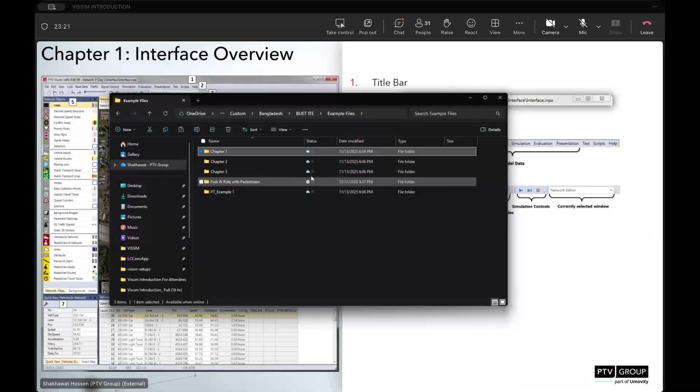Okay, so this is the interface overview. When you open the VISSIM software, the interface is pretty similar to any other GIS software, or any AutoCAD software. If you're familiar with ArcGIS, it's pretty similar. The main window is your network editor window, where you will draw everything of your network object, network item, or any kind of rules and regulations. This is your main network window.

On the left side, this is your network object window. From here, you can select your appropriate network object that you might need to enter into your network. For example, the first section you see is link, then desired speed decisions, reduced speed area, and then vehicle input, nodes, etc. Those are the things.

On the top bar, those are pretty much common standard format. You might even be familiar with all of those, even in Microsoft Word. So you have this title bar, menu bar, toolbar, etc. This is the title bar, this is the menu bar, and this is the toolbar.

If you look carefully at the title bar, we have a few additional pieces of information. First, it says which VISSIM software you are using. For example, here it says VISSIM 8 Service Pack 6. Then immediately after the software name, you'll see the file name that you have opened. For example, this file name is interface.inpx, located in that folder.

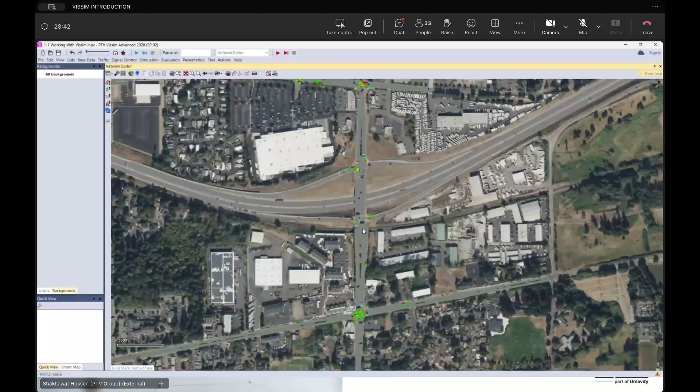All right, so under the signal controller, after opening this one, first thing is our main purpose is just to run the simulation and see how it looks like. So to do that, we don't need to be worried about the signal controller.

So what we can do is delete all the signal controllers there. To delete that, go to Signal Control, then Signal Controllers.

Again, go to Signal Control, Signal Controllers. From here it will open up this window. Select this one, and after selecting all of them, select all and delete the signal controller files.

So select all of them and delete. Delete all of them and confirm delete. That's fine.

Okay, so when you are done, now it's time to run the simulation. You see on the toolbar we have this icon, the green play bar icon. Just click that one and you see the simulation is running.

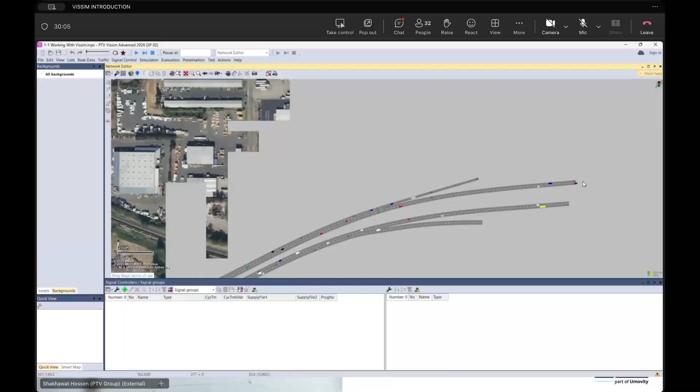You can pause it somewhere here. You see, a vehicle is generating at every starting point, and they're following the simulation, following the path. You see.

We can also continue, if we hit the play button it will continue the simulation. You see. Again, I'm hitting pause, so now it is paused.

Now it would be good if we can look into the simulation, or the network, in 3D view. So here you see a box, a cubicle box. If you hover over there it shows 2D/3D. If you select that one, now it is in 3D mode. You see, you can see all the vehicles are there.

You see some rectangular shapes instead of vehicles, because for that specific one we don't have the 3D model. That's why they just look like rectangular cubicle boxes. For example, if we proceed the simulation, you see the vehicle is running there, and so forth.

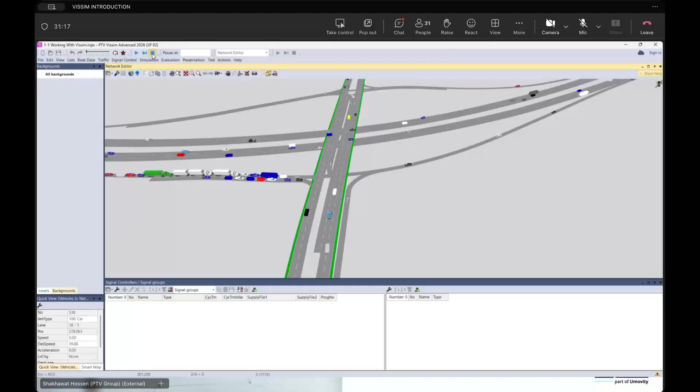All right, so that is the very basic thing. From here, let me show you a few additional things.

So for example, if we go to our view from here, Network Object. All right, so you remember on the first slide I discussed about the network object, where did we remove the signal controller, because the signal controller was broken here.

The signal controller was prepared with some old signal controller module. So with the new VISSIM, those old signal controller modules don't work. That's why.

All right, so here under the Network Object, if you look carefully, you'll see under the network object we have some subsections, right? This is the first subsection, this is the second subsection, and each subsection is divided with a wider grayed out line. So this is one grayed out line, another grayed out line, another grayed out line. We have 1, 2, 3, 4, 5, 6, total 6 subsections, right?

Okay, so there's a purpose to those subsections under the network object window. If you notice carefully, the first subsection is about network objects input, any kind of network objects input that you probably need to enter into your network for the modeling, that is under your first subsection.

So for example, if we are going to prepare a model, we definitely have to start from the link, right? We have to draw the link first. Then desired speed decisions, reduced speed area, conflict area, priority rule, stop sign, all the way. So those are all input parameters or input features. That's under the first subsection.

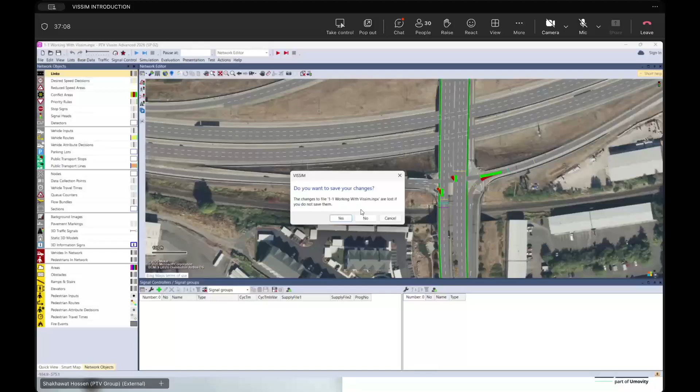All right, so it is opening a new file, and here our task is to import a background map and to rescale that background map. So for that, first let's see what we need to do.

Let's remove them. Select the background map option from your network object window, and into your network editor, right click and add new background image. Again, first select background image from your network object window, then come into the network editor window and right click and add new background image.

Once you do that, it asks for the background file. Go to activity lesson 1-2, and from there select the Aerial_West.tif file. Click open.

As I'm working from the cloud, it is taking some time to open the file. If you have downloaded the file, you should be good - it will automatically or instantly load. It's taking too much time, let's try again... oh, it's loading. Once it's done with 100% loading, it will show up there.

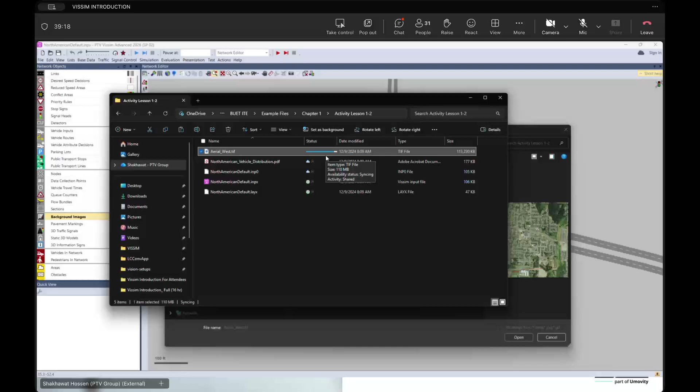All right, so now it's done, and here we can see the background image is loaded. However, this is not properly scaled. This is one of the intersections, and this intersection is basically this intersection from the image, right? You can see those two are at different scales. So after importing the image, the next thing we need to do is rescale the image.

For rescaling, the first thing we need is some reference point. For this exercise, we already have a scale we can apply. For example, from the corner of this building all the way to the corner of that building, the distance between those two points is 4,095 feet. So what we can do is right click and set scale.

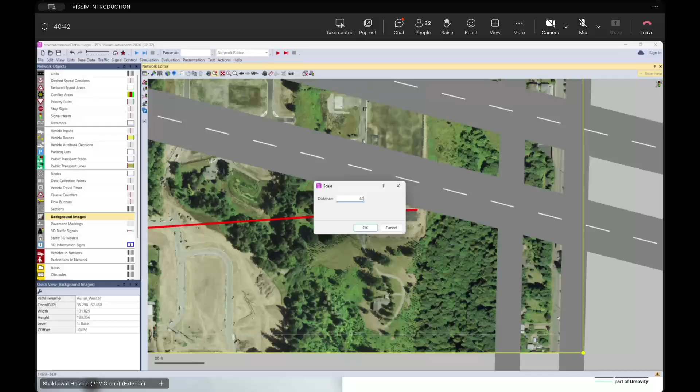Now left click here and hold your mouse, then come all the way to the next point, and release your mouse here. Now it is asking for the distance. We know that distance is 4,095 feet, right? So put 4,095 feet, and now VISSIM automatically rescales the image.

So after rescaling, now we know this intersection is that one, and we need to drag it and match the intersection here. All right, you see, after rescaling the image, you can put the image exactly as the background of the drawn network.

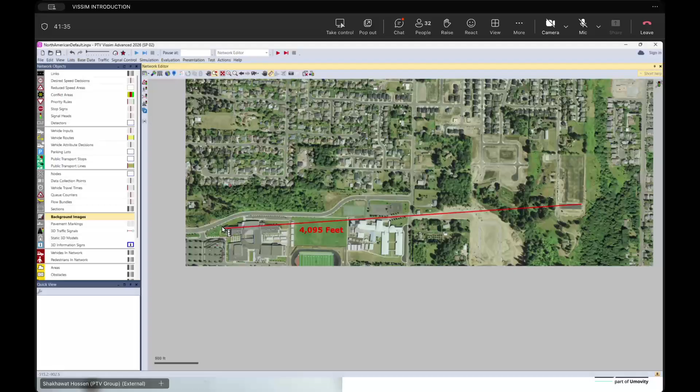So after rescaling the image, we can also verify whether we have properly rescaled the image or not. As per our rescaling, the distance between those 2 points is actually 4095 feet, right? So we can check and verify using the measure distance tool. If you select that, and select this starting point and go all the way to here, you see 4096, 4095.77, almost the same, right?

So from here we can easily say, okay, we have almost properly rescaled the image. We can also verify that by seeing if the network is properly placed on top of the intersection. Seems like it looks so. So we have properly rescaled the image.

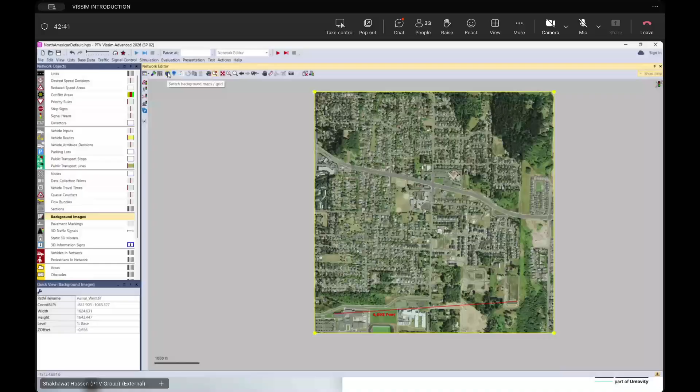All right, so now in most cases you probably won't need to use any kind of imported background image. Instead, probably you will directly work on top of the satellite image - that could be Google Map or Bing Map. So we can also do that one as well. Here you see there's a globe icon on the toolbar of the network editor. So if you just click that one, you see it has automatically loaded the network object or satellite image.

So from here, if we'd like to turn off the background map, just select any other network object window. For example, just for training purposes, I select node. And now under the background image, at the very left side, you see there's an icon, toggle visibility in current network editor, so we can either turn it on or off. I'm just turning it off. Now we can see the real satellite image, and this is the intersection.

One thing to keep in mind: if you need to turn on or off some of the network objects, you cannot do that by selecting that object. For example, if I'd like to turn off nodes, I cannot do that right now because nodes is already selected - if I click this one, turn on or off doesn't work. If I need to turn on or off nodes, first I need to unselect node. So let's select some other object. Now nodes is unselected, and now you see that one is working.

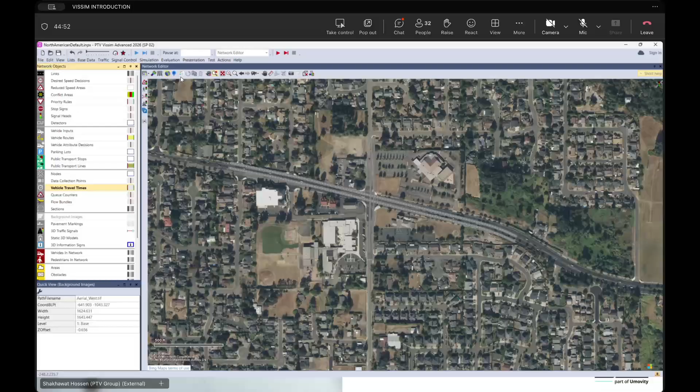Yeah, because the network file was already prepared based on this background map, that's why it already knows where it is located. For training purposes, I created the network file on top of the satellite map, and then I turned that off. That's why initially the satellite map didn't show up, but it was already there.

Does the software also recognize the university road network? The software doesn't recognize any of the road networks. The only thing is, first you need to draw the networks on top of the satellite image. So by default, the software doesn't know anything. It only knows here is the satellite image, and on top of the satellite image, then we need to draw the network.

All right, so this is one of the crucial things when we are doing modeling. First thing is we need to define our driving practice or driving conventions. For example, if you look carefully into the network, most cases you will see right-hand side driving, which is also common in North America. And for some cases - India, Bangladesh, Australia, or England - you will see left-hand side driving practice, right?

So in Vissim... could you please mute yourself?

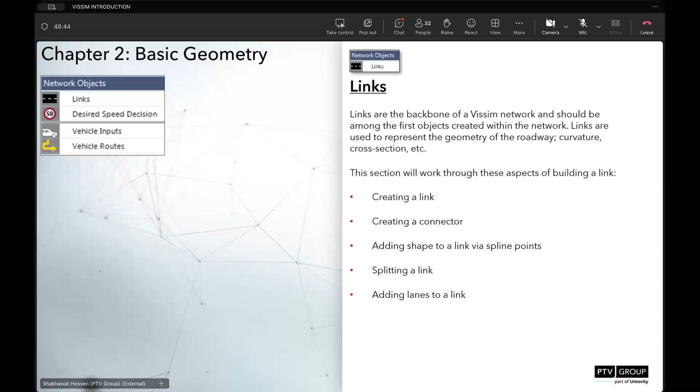All right, now the real example from scratch that we can do with VISSIM. I believe that would be interesting to you. First thing is link. The first option is we need to create a link, which is basically the road itself. On that link, we'll be discussing as we move forward. You can see how we can create a link, how we can create a connector, or how we can shape or reshape a link, etc. So after the link, we have activity lesson 2-1, and from there we'll be practicing these exercises, where we'll be creating a link, creating a connector, or splitting a link or multi-lane link, etc.

That's under activity lesson 2-1. Then in activity lesson 2-2, we'll discuss the connector, how we can draw a connector. The main purpose of connector is self-explanatory by its name. Basically, a connector connects two links, right? So when we need to connect two links, we can do that with the connector. Then we'll continue our practice with drawing a link or drawing an extra lane, and add that one with those connectors.

So to do that, let's go to our activity lesson 2-1. Same thing: if you go to chapter 2, and from there activity 2-1 links, just drag and drop it into your VISSIM instance.

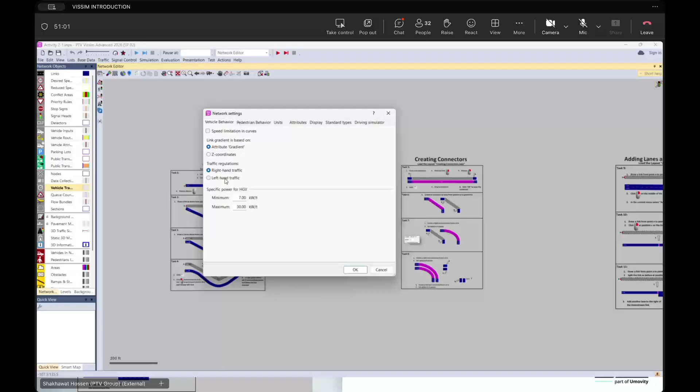Now go to our first exercise, task 1. Task 1 is we need to create a link from point A to point B. We need to create a link. The first thing is to create a link. The first object that we need to choose is link from the network object. So just select link, that's the first thing we need to choose.

Now we can create a link two ways here in the network editor. In VISSIM, the hotkey is the control key, so anything you need to draw, you can do that with the control key. So control key is the hotkey for VISSIM. Now after selecting the link, hold your control key and hold your right click on the A point and drag your mouse all the way to B, then release your right click. It will open up this window for the link, asking for some additional parameters or info. We don't need them right now, just click OK, and you are done with creating your first link.

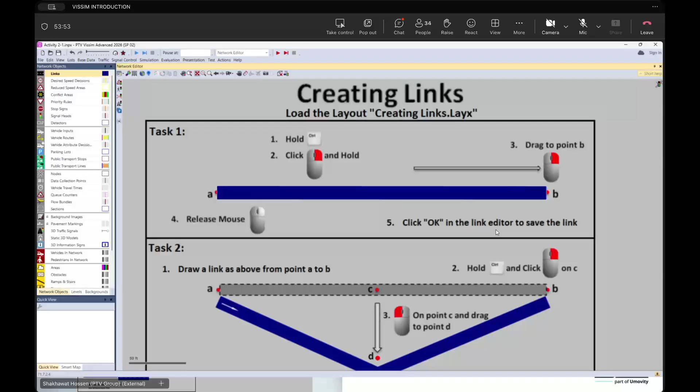Now, next we need to create a link and add one intermediate point at the midpoint. First create the link from point A to B, and exactly at the middle we need to add a point. To do that, hold again - in VISSIM the hotkey is the control key. So hold control and right click here, and it will add one intermediate point. Now you can drag it at this point.

I'm showing it again. Just create a link. Make sure you select the link, hold your control key and right click there. And now you see.

Now here we can see we need to create that sag point, however the starting point and ending point should be straight. So same thing: create the link and add a few more intermediate points - one intermediate point here, another here, and another here. Now we need to create the sag at the middle, keeping the starting point and ending point straight.

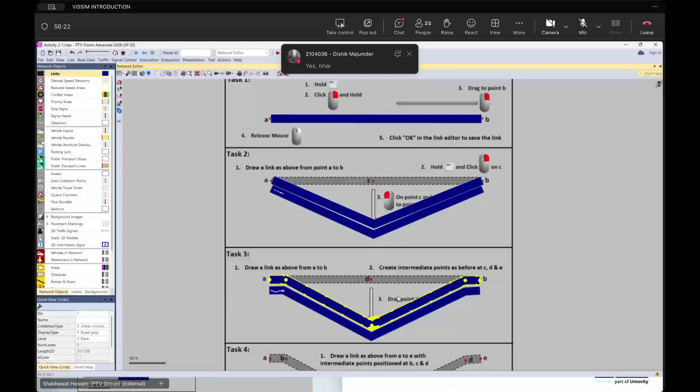So now we'll do the same thing here, however here we can see the link is curved instead of straight. So we can do that one - create the link first and add those intermediate points: one intermediate point here, here, and another intermediate point here. Now we can move this one.

Now to create that curve, select the link, right click, and from here you see 'generate spline'. Select that one, and now it is asking how many intermediate points I would like to add. Intermediate points are basically between the section or on a section between the two points - VISSIM will automatically generate extra intermediate points. For example, this section is bounded by this point and this point.

So here, if I put 3, VISSIM will add 3 more intermediate points between those two, and again 3 more between those two - those are the intermediate points. If I click OK, you see 1, 2, 3, and between those two, 1, 2, 3. So in that way it will create a curvature. If you add more intermediate points, for example instead of 3 if I add maybe 9, then that would be more smoother. You see, more smoother.

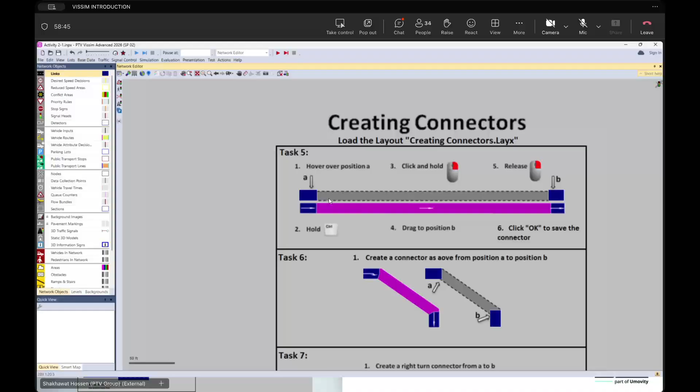So next option, now that we know how we can create a link, our next option is how we can create a connector. The main purpose of the connector is to connect two links. For example, here we have link number 1 and link number 3, and we need to connect that with this connector. In VISSIM, good thing is we don't have another exclusive feature for the connector - connector is pre-built within your link.

So with the link, select the link and do the same thing from link 1 to link 3 - meaning hold the control key, right click here and drag your mouse all the way to point b. Up to this point you can see it's still link, and on the right side it says add link. But immediately when I snap this onto another link, it says add connector, and it changes color from blue to pink. So from there we can confirm that this is a connector, not a link. Now if I release right click and control, it is asking for some additional info - just click OK, and this is your connector.

Again, hold your control key and start from anywhere on this link, not outside. You must start your connector from one link and end that on another link. So start your connector from here - still that is a link because it is not snapped with another link. So just move it here, and you see that's a connector, and click OK.

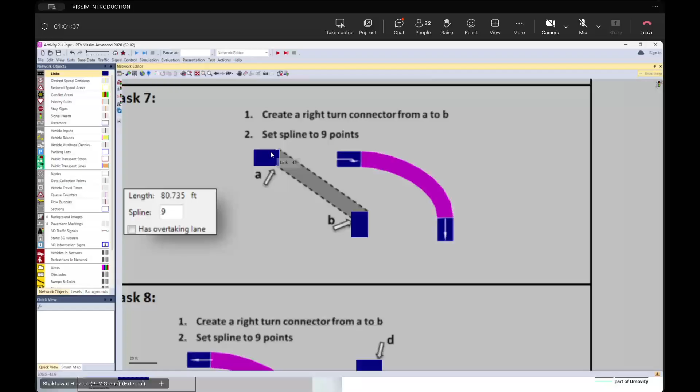Here we need to repeat the same thing, but the connector is not straight, it's curved. So right click, and instead of clicking OK, under this connector window, the second option, intermediate points, is by default 0. Now we can put some intermediate points, say 5. VISSIM will automatically add 5 intermediate points between the two existing points. So if I hit OK, VISSIM automatically generates extra 5 intermediate points and automatically makes that curvature.

Now we can repeat the same thing here, but the task is a little bit different. Up to this point, this is a one directional road, and here we have a two directional road, this way versus that way. We can do it the same way: first create the connector here. It's asking for intermediate points, and by default it's taking the last value I put, 5. Now do the same thing from link point C to point D, and click OK.

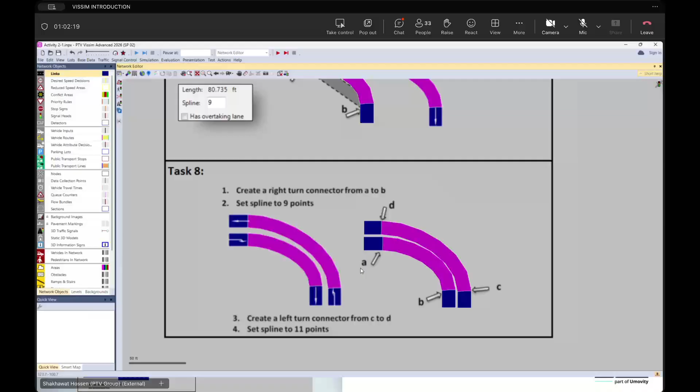All right, our next task is to draw a multi-lane link. That's pretty straightforward. First we need to draw a link.

When we are done, just select the link, and on either side, at the middle, you see there's a wide yellow bar. You can just drag as many lanes as you want, on the top or on the bottom, whatever. So you can add multiple lanes that way. Now it has a total of 3 lanes.

If I open the window of this link, here you'll see it says the total number of lanes is 3. You can also change the number from here, and you'll see each lane's information at the bottom: 1, 2, 3, total 3 lanes, and each lane's width is 12 feet. That's how you can do a multi-lane link.

Okay, now what if you need to split a link? Let's create a link first, a single lane link. We might need to split the link, right? So what we can do is, at the point where you might need to split, right click and select split link here.

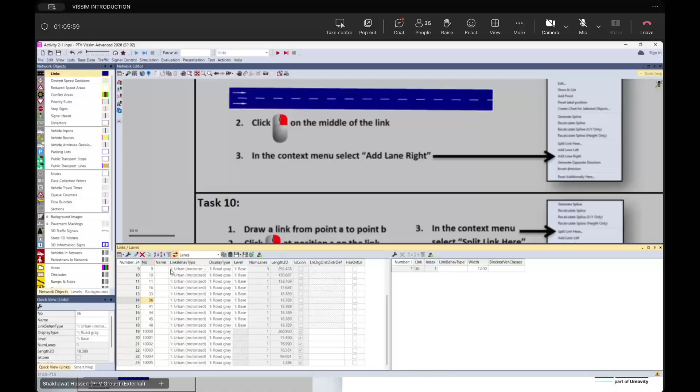As we split the link, VISSIM will automatically split it and add a connector connecting those two links. That's how we can split the link. Again, select the link, right click and split - you see, it split the link here.

Now here the task is we need to split the link and add one more lane at the middle. So same thing: first draw the link, and we need to split the link at point C, and also split the link at point D. And now we need to add one extra lane into the middle link.

So again, draw the link, split the link here, split the link at point D. Now just add one more lane in the middle section.

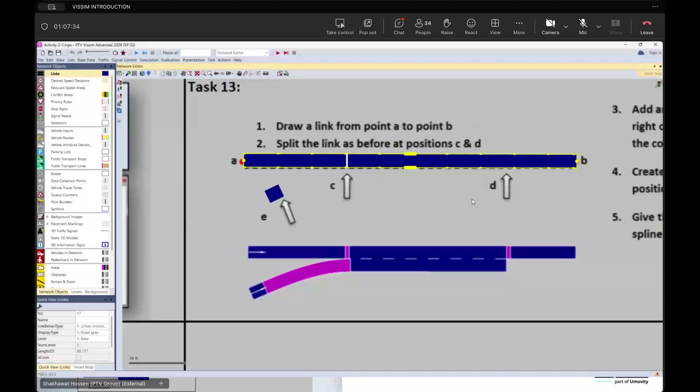Now here we need to complete this task. Here you see, for example, this is the freeway highway, and there is a ramp coming from point E, and we need to merge that ramp with the highway. So the task is simple: draw the link, split the link at point C, split the link at point D, add one more lane here, and now we need to add a connector from this link number 16 to link number 18.

So to draw the connector, what we need to do, hold the Control key and start from anywhere of this link and go all the way there. And you probably notice VISSIM will automatically add connectors connecting those two lanes.

So if you want to connect or drop the connectors just on the first lane, you can do that. You see there's a white yellow bar, so just drag and drop it here. Now you see it is just a connector connecting one lane versus one lane.

If you want to add a nice curvature like this one, double click the connector and the number of intermediate points, put some values. Maybe I can put 5 and you see it automatically creates that nice curvature.

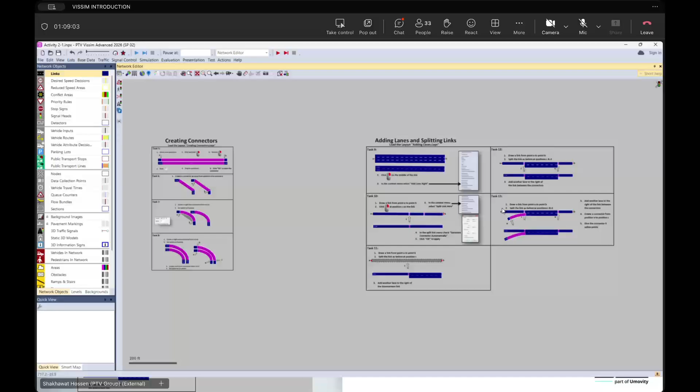All right, any questions regarding the link or connector or any of the tasks from task 1 to task 13 that we have practiced? Any questions regarding that one?

Okay, seems like there is no question. So let's proceed with our next exercise.

Now, let's go to our activity lesson 2-2, and there we have an exercise to complete this intersection. So activity lesson 2-2, and there's an on-ramp exercise that we need to complete. Same thing, just drag and drop it here.

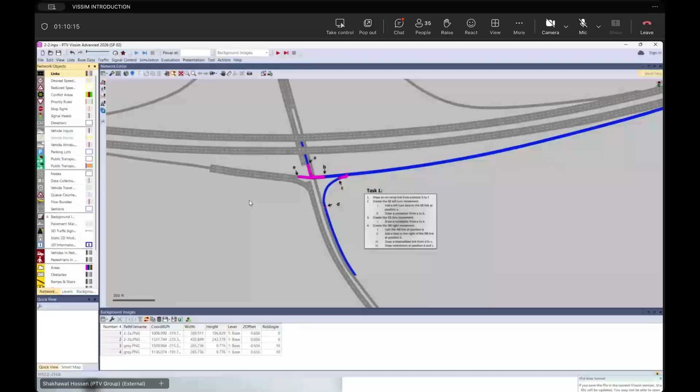All right. So here, same thing for this exercise. We also have a written instruction here. You can, if you can, directly follow that instruction. Okay.

Now here our task is to complete this exercise. This is intersection, and there's a ramp. That ramp connects that highway, which is link number 23, and we need to complete that one.

All right, so first, okay, let's start from here, or maybe we can start. Okay, so let's draw a link from point B, yeah, up to that point.

All right. Now we need to, if we need to realign this link, what we can do, we can add some intermediate points. Okay, so by dragging those intermediate points, we can realign the link. Okay, you see now that is properly placed.

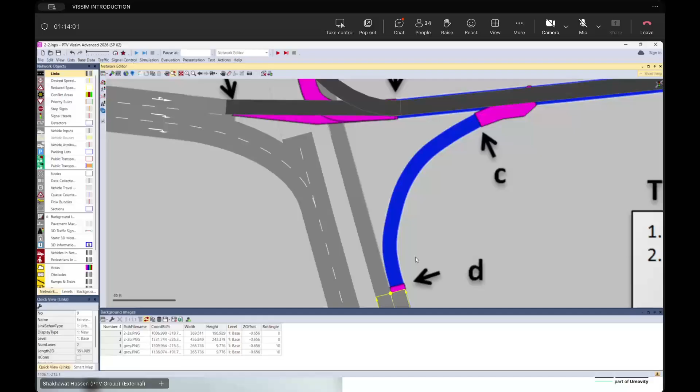And now here, from the color, we can see that is a link as blue color. So we can draw a link from this point to all the way there. And we can add some intermediate points just to realign the link. Or what we can do, right click and generate a spline, and VISSIM will automatically do that curvature for us.

And if I move this one, sorry, and now this one. All right, okay. Now here we are done, and now from the color we can see that is a connector.

So we need to draw a connector by connecting link number 9 with link number 26. So I'm just adding a connector, and that is from the rightmost lane to that lane. So I just drag that one, and we need to do the same thing into that point. Maybe you can put some values there, so VISSIM will automatically add a nice curvature.

Looks good. And one last thing is we need to extend this one all the way to here. We can add few intermediate points just to realign the curvature.

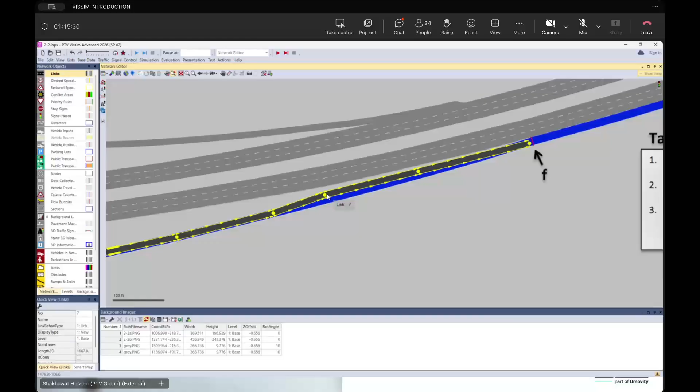All right. Now here, this is basically part of the main line, so this is one extra lane on the main line. So we need to split the link at point F. We need to split the link at point F. And we need to add one extra lane to the right.

Now, at this point, we can see this link number 7 and link number 28 is connected via a connector, right? So we can just draw a connector from this point to that point. And by the same way, just dragging this one, and that is from the first lane to the first lane of link number 28. In that way, we are done with this exercise.

All right, now you might have a question on the last exercise. When you drew something, if that is a link, that will automatically show up as blue, and when that is a connector, that automatically shows up as pink color. But here, either that is link or connector, all show up as gray color, right? So you can define the color under your edit graphic parameter setting.

So to replicate this one exactly with our last exercise, what we can do is under the link, there's an option edit graphic parameter, this one. If you click that one, and from here, fill style and drawing mode, use display type, change that one to use color scheme.

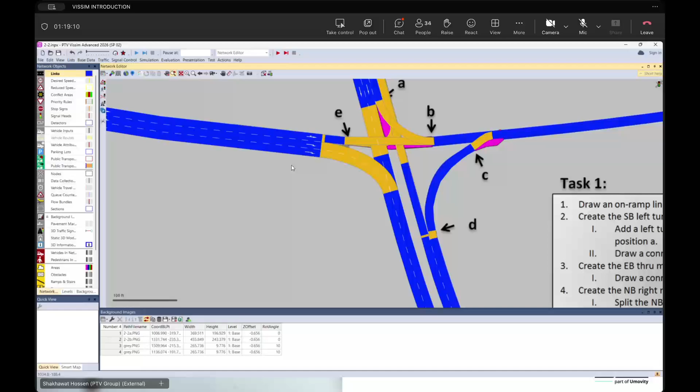Just in case if you'd like to do the same thing from your last exercise, definitely you can change the color, or you can choose the color by your own. Instead of pink, maybe you can put some orangish color or whatever. You see now, so that is a good thing. So if you put two separate colors, one for the link and one for the connector, then from there you can easily identify which point you have link, which point you have connector, or if you're missing a link or missing a connector, you can easily identify by just observing the color.

All right, here still you can see some pink color. Do you know why there's a pink color? Here still you can see some pink color. Do you know why we are still having that pink color?

There's a question: can you merge a link and connector to be a link only? No, you cannot merge them to be a link only. So what you can do, there are two ways. For example, maybe you have a link here, and if I split the link, so it is split into two, and it has a connector. If you really need to merge them...

One good feature that has been available for the last 3 to 4 years: we now have an undo option in VISSIM, so you can easily undo with a simple undo method, just as we can do in any Word document. Control Z. If you hit Control Z, it will automatically delete the connector and create that single link again. That's one option you can do.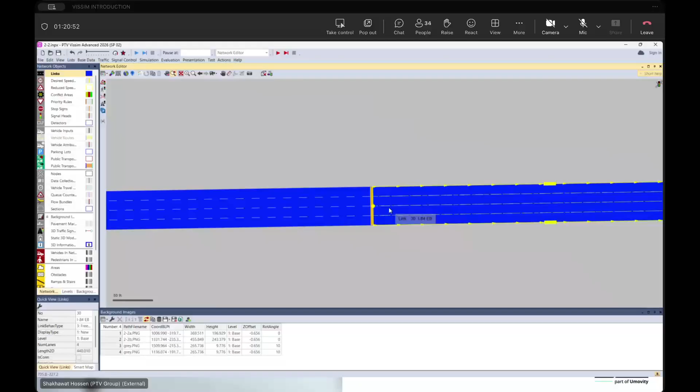Or if you don't have that undo option, or if your undo is too far away to merge back to the previous version, what you can do is just delete one of them and extend this one. That's another way you can do it.

All right, so now if we continue... yeah, the pink color is from the background image. Exactly.

All right, now our next thing is desired speed decisions. So when we draw the network, our first option is to draw the link. We are done with drawing a link, and we know how to draw a link, how to draw multi-line links, or how to draw connectors, right?

So when we are done with that, the next thing is we need to provide the appropriate speed guiding decisions. Those are basically based on desired speed decisions. We can provide the software, or VISSIM, to guide the vehicles or traffic to run under certain speed limit conditions. So the speed limit of a certain road, or what we call desired speed decisions, is the allowable speed limit that the jurisdiction or corresponding authority allows a certain vehicle to run or drive under on a certain road.

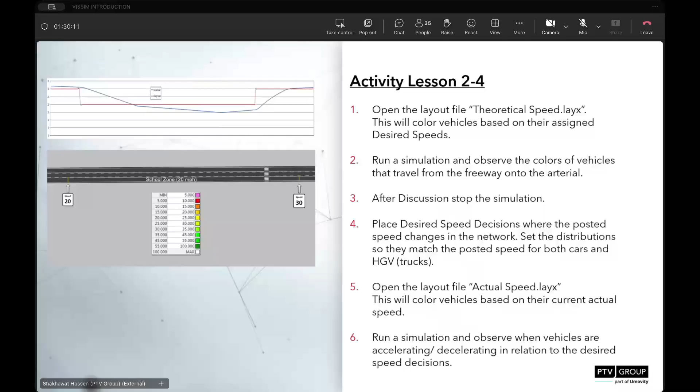So our design speed is the 85th percentile speed of a certain road. From there, we know what our desired speed is, and we can assign that specific desired speed on a road, and even into our VISSIM model. To do that, we have exercise demo 2-3, and we can check it there, plus extra exercise under 2-4 with desired speed distributions.

So let's go to our activity lesson 2-3, and from there we can see how we can define our desired speed decisions into VISSIM. This is demo 2-3.inpx.

Here you see there's a link here, this is link number 1, and this part from this point all the way to here is a school zone, and on this school zone speed is restricted. For example, on this school zone speed is allowed up to maximum 20 mile per hour. So when a vehicle appears at this very specific point, we need to guide the vehicles with that specific speed, or with that specific speed profile.

So we already have a desired speed decision here. For experiment purposes, let's delete this one.

Desired speed decisions is the second item from your network object window. Just select desired speed decisions from there, and place it here again using the VISSIM hotkey: hold control and right click. It will open up this window.

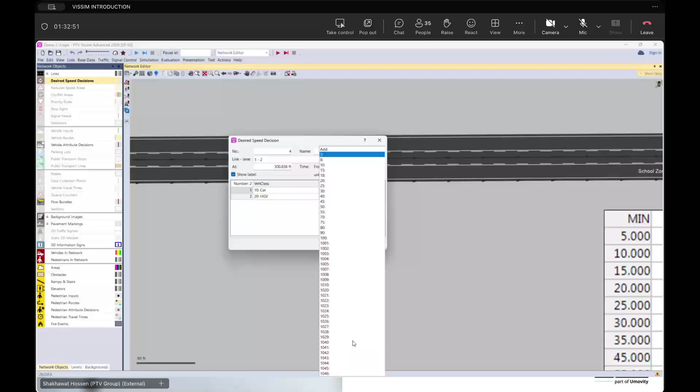Under the desired speed distributions, it adds some desired speed distributions from the speed distributions list, which I'll show in a moment. Right now it's only showing the corresponding number of the desired speed distributions, and from the number alone we cannot explicitly say what those numbers mean. For example, 3, and if I click the drop down, even that number is not self-explanatory. So with this, just click OK for now.

Now we need to check the desired speed distributions number. To do that, go to base data, look for distributions, and under distributions look for speed. So: base data, distributions, speed. When you click that, it opens this window, and here we can see 3 means the speed profile, where lower bound is 2.49, upper bound is 3.73.

Yes definitely, you can add rickshaw for the context of Bangladesh, or even auto rickshaw, CNG, TomTom, whatever. But for that, you need to know the vehicle's physical characteristics, basically the acceleration profile and deceleration profile of that very specific vehicle. For example, for the rickshaw, first you need to know its acceleration and deceleration profile. Once you know that, you can easily add it.

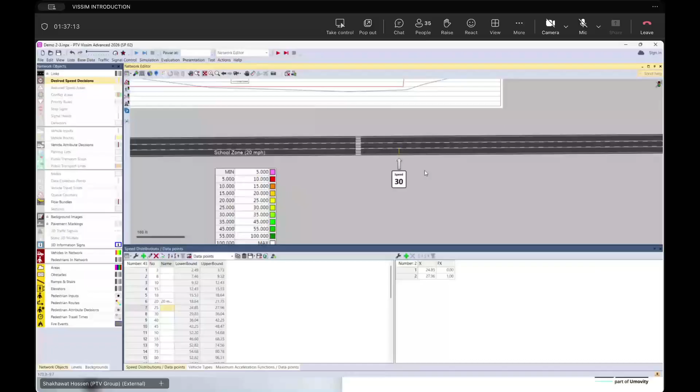And we will also need another one, 30 mile per hour - that could probably be this one. So when I put the name, and now if I go to this one and desired speed decisions, if I double click this one, now from the desired speed distributions drop down, under 20 we can see that 20 means 20 mile per hour, we can select that one. For that truck, we can select this one as well. Now click OK.

Now that means any vehicle driving here, once they reach or pass over this point, from this point they're supposed to slow down their vehicle and drive at 20 mile per hour.

All right, to test this, let's run the simulation so we can get our real result. I'm going to slow down the simulation a little bit so you can follow. To slow that down: simulation parameters, and from here instead of simulation speed maximum, I'll run the simulation at some factor. Let me explain what this means - simulation speed set to maximum means the simulation will utilize the maximum speed or resource of my CPU, running at the maximum speed it can obtain.

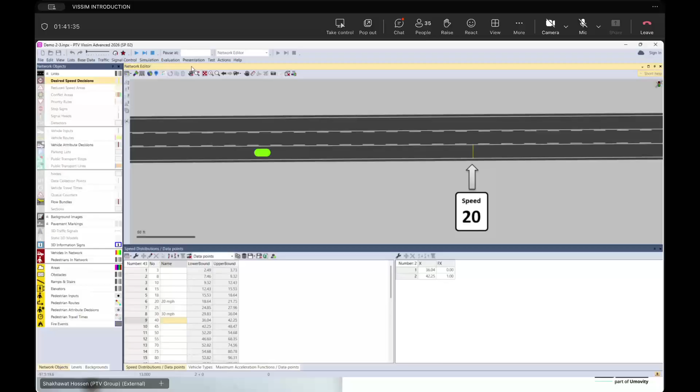Now, as the simulation is running, I pause it and select this specific vehicle, and I would like to get some information from that vehicle. So what I can do is go to View, and from here look for Quick View. So it opens up this panel, and you can dock it here.

So now if I select this vehicle, it shows this vehicle's desired speed is 31.44 and it is running at 31.76 miles per hour at this point. If I proceed, you see its desired speed is 31.44 because that was defined at the starting point.

But that vehicle is supposed to slow down after crossing this mark, as this crossing bar is designed to guide vehicles with a specific desired speed decision of 20 miles per hour. So if I run the simulation, it's still running at the same speed as it approaches. I'm zooming in. Still, it is not passing over that one.

Immediately, the vehicle hits that speed decision mark. You see the desired speed decision, initially that was 31 point something. Now that is changed to 19.25, meaning now it is following the mean value of the desired speed decision, 20 miles per hour. As the vehicle was driving at 31.47, or around 30 miles per hour, now the vehicle knows they need to slow down and cope with the designated speed of 20 miles per hour.

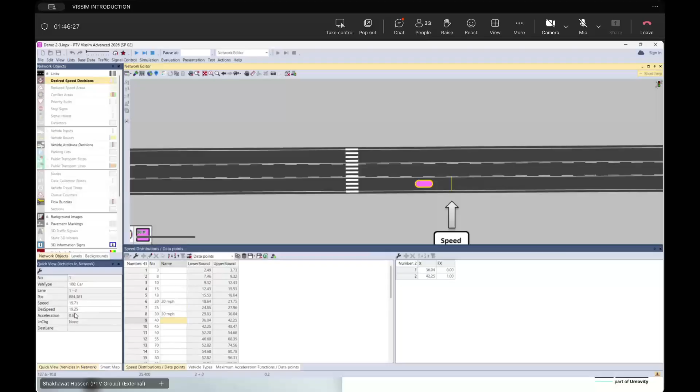So we can follow this vehicle. It is supposed to run at 19.25 as it's still within the school zone. Immediately it hits the new desired speed decision. If I proceed the simulation, still 19.25, still 19.25, and at the next timestamp it will hit that one. Still 19.25. Now it hits the desired speed decision, and you see immediately the desired speed decision is 31.05.

As the vehicle was driving around 20 miles per hour, now it needs to speed up to match the 31.05. That's why you see the acceleration profile is positive and it is accelerating more. You see 4.8 to 5.47, and it is 6.7, 7.44, accelerating more to match with the new desired speed decision.

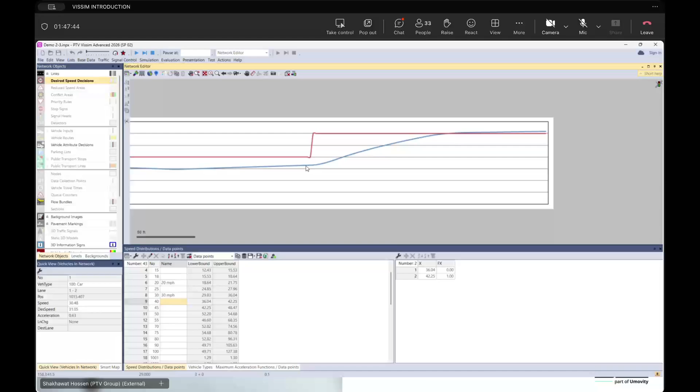At some point it will match with the desired speed decision, but it still needs some space and time. From the graph we can see at this point this is the actual speed, in blue. It was running at around 20 miles per hour, but once it knows about the new desired speed decision of 30 miles per hour, it accelerates and speeds up, and at some point it matches the desired speed decision and continues with it. Now it almost matches, and now it continues with the desired speed decision.

So that's the thing for the desired speed decisions. Anytime you can place a desired speed decision on a certain link, area, or zone, and you can get the traffic to behave in that way.

Any questions regarding the desired speed decision?

All right, now it seems like there's no question. Now here's a question for you. For example, on a certain road, maybe you observe that the observed speed is too low, maybe because of long queuing or a long jam. You might see on the Nilkhet road that the observed speed is around 10 kilometers per hour during peak time, with vehicles moving pretty slowly because of the queuing or jam.

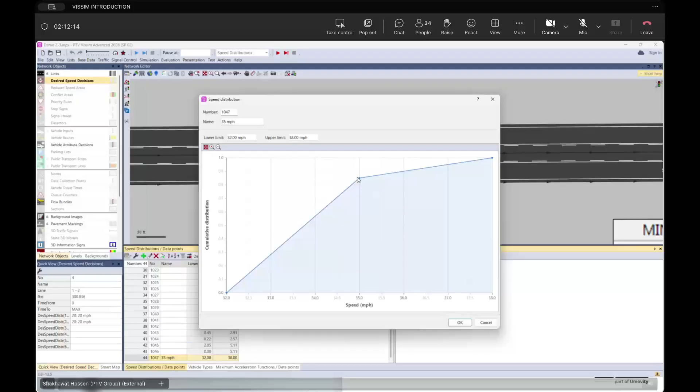From here, on the right side, you can just edit the values. We know the speed should be 35 and this value should be 0.85. Now VISSIM automatically creates that exact point for you, 35, 0.85, meaning 85th percentile speed is at 35 mile per hour. And now we have that 35 mile per hour, and we can define that one here using 35 mile per hour.

What does setting 85th percentile speed mean? Does it mean 85% of the simulated cars will follow the rule? No. This is the desired speed limit, the posted speed limit of a road. On a road, we have a posted speed limit, the allowable speed limit of that road. So desired speed decisions represent the allowable speed limit of a certain road, meaning all vehicles are supposed to follow that desired speed.

All right, we are done with this one, desired speed decisions.

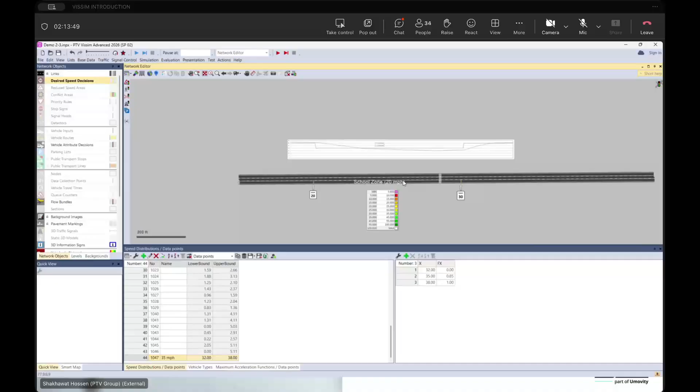We can also discuss the sync option. In VISSIM we have a sync option. For example, if I open the link list and select any link, you see it automatically gets reflected on the network editor window. Here you see the network editor. If I select link two, it's automatically highlighted there. And vice versa, if I select link one from the network, it's also highlighted in the link table. The reason is that the network editor and the link list, or list of that specific network object, are synced.

Here you see this sync icon, similar to the Wi-Fi WPS button. So if I turn that off, now those are not synced. If I select something from the network editor, it won't be reflected here, or if I select something from the network list, it won't be reflected into the network editor. So to reflect your selection from one window to another, we need to sync those two windows. If we turn that on, now we can see all of them are synced.

For example, if I select this one, it's already selected there, but I don't know where that is. Instead of zooming out and zooming in to find it, we can just right click and zoom, and this will automatically take you to that very specific point.

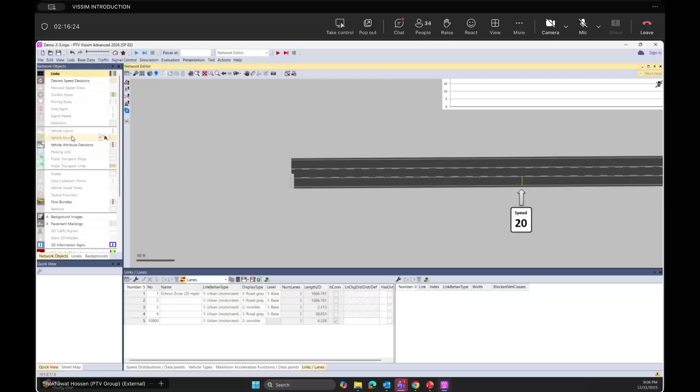Here you see the vehicle input. First, let's turn that on, vehicle input. Now select the vehicle input, and same thing, hold the control key and right click here.

When you do that, VISSIM will automatically snap your vehicle input at the very starting point of your link. This one already has a vehicle input at this very starting point, and this is the new one I have just added, a vehicle input here.

So let's delete this one and work with the one that was already given. They created a dummy link here, so that's why it is grayed out. We can also do the same thing, so let's do the vehicle input on our real link.

Here we need to put some values. Maybe our vehicle input is 450. This is from link number 1, and link number 1 is the school zone, 20 miles per hour.

One thing to remember in VISSIM: any kind of volume you see is based on hourly rate. Even if I hover the mouse over the title bar, it explicitly says number of vehicles per hour, not per time interval.

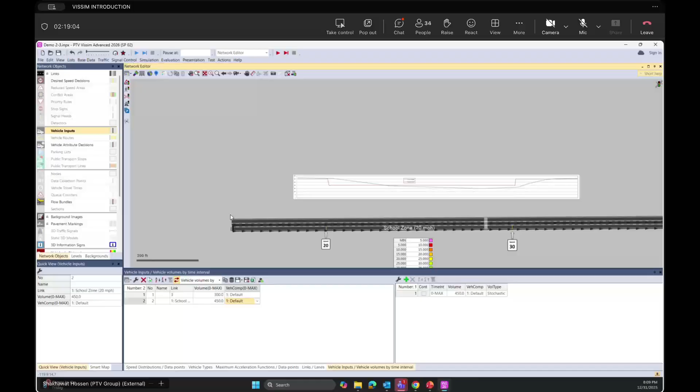Now for your built network, make sure you enter vehicle inputs for every starting point. So we have one starting point here, and for the westbound traffic we might have another starting point here - yeah, this is another link.

So we might need another vehicle input at this starting point. This could be westbound traffic, right? And maybe this one is 500.

Now if we run the simulation, we can see vehicles generating from this point. For example, if I run the simulation, you see vehicles also generating from this point.

Oh, I didn't put in numbers. Okay, 500. Now if I run the simulation, you see vehicles generating from that point.

So in that way, you can define the vehicle input at any of the starting points - each starting point of your entry into your network.

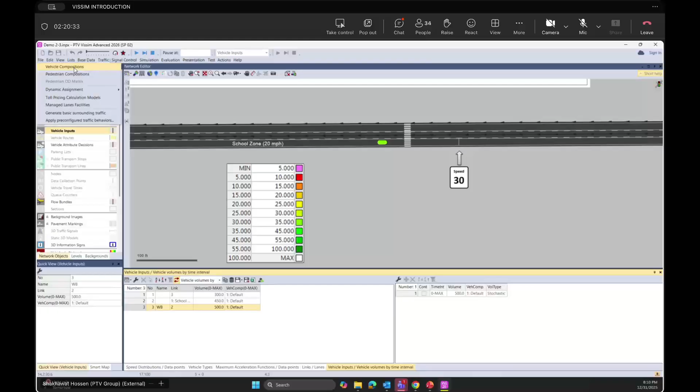So under vehicle input, we have vehicle compositions. For that, what we can check is go to Traffic, and from here look for vehicle compositions. By default it shows the default vehicle composition, which is based on vehicle type, only car.

0.98% car. Ideally this should have 98% car and 2% truck, 0.02. So this could be the ideal vehicle composition - 98% car and 2% truck.

From your own observation or survey, if you have a very specific vehicle composition, you can define your own custom vehicle composition. For custom, you might have car, truck, or bus - maybe 92% car, 5% truck, and the rest, 3%, bus.

So for your case, your vehicle composition could be different, and you can also define specific speed distributions for each vehicle type. If you need different speeds for different vehicle types, you can define that here as well.

Once you set all of that under vehicle compositions, you're ready with vehicle type, desired speed distributions, and relative flow. Relative flow means what their modal share would be - the modal percentage on the road.

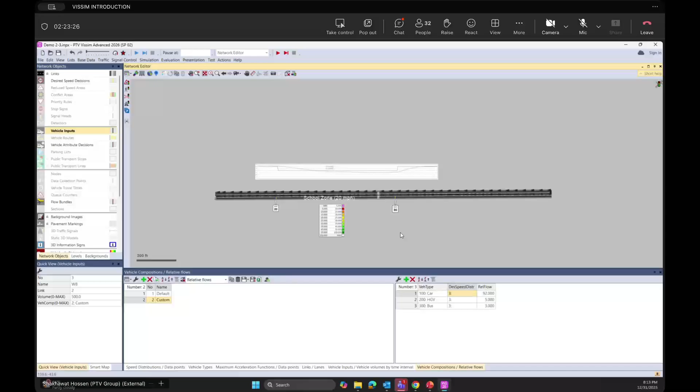Okay, so we are almost at the midway of our today's session. As the content is very vast, I'm just skimming through the brief description of the rest of the items. For example, under vehicle route, you can define which route the vehicle should follow. So starting from a point, there might be multiple routes at the downstream point. You can define the vehicle route, so among 100 vehicles, maybe 50 should take left, 40 go straight, 10 go right. You can define that under vehicle routes.

Vehicle attribute decision is an advanced method to provide some kind of scripting values. So if you need to overwrite simulation values, or overwrite some vehicle parameter values on the fly, you can do that by using vehicle attribute decisions.

Parking lot is for parking simulation. You can also do parking simulation in VISSIM, so dedicatedly we have parking lots for that. The rest of the two, public transport stops and public transport lines, are dedicated for public service, like public bus or public train. In the second part, we'll discuss how we can model public transport, for example given a road network, how we can define a bus route, etc. We'll discuss that in the second session.

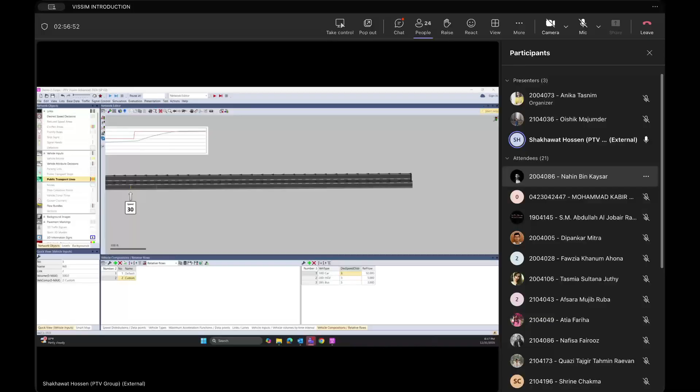All right. Our second session is dedicated explicitly to public transit. For that, I've also shared a folder with you for the public transit example. If you go to the folder, there's a folder named pt_example1. Here we have two examples: one is transit.inpx and another is transit_final.inpx. Let's open the first one, transit.inpx. So here we have a pre-built network file, and on top of this network file we will be drawing the public transit line.

So, drawing the public transit line raises a few questions. What are the basic differences between private transport versus public transport, or what are the main considerations we should think of for a public transit system? Let me give you a hint: for private transport, our main consideration is the shortest time, shortest path, accessibility, or mobility, right? So for public transit, what could be the potential considerations? Any idea? Shortest time, shortest path, or anything else? What could it be?

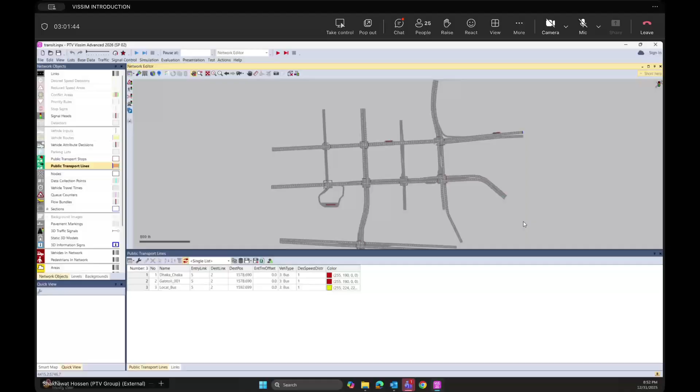For example, a bus that might be a public transport from Dhaka. The driving behavior of that bus or the routing choice of that bus should definitely not be the same as the typical driving behavior or route choice of a typical car, right?

It has a very well-defined route, a very well-defined stop, and a very defined limit of headway it needs to maintain. However, in context to our Dhaka city, the headway is a little tricky to maintain for the bus because of the congestion and queuing. They're supposed to maintain a very specific headway, but because of congestion and queuing, they cannot. In ideal condition though, they need to maintain a very specific route, very specific stops, and a very specific headway.

So for those cases, what are the parameters or network object items that we need to specify for the public route? First, we need to define a very defined driving route for the public transport. Second, we need to define the very specific stops where the bus should stop to alight or to board the passengers. Those are the main two things we need to define under public transport route choice or public transport modeling.

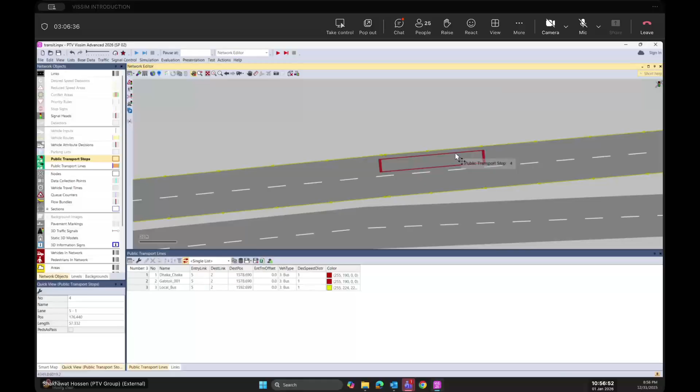Now right click, and choose add platform edge or add lay-by stop. Just click that one, and VISSIM will automatically create a lay-by stop and move that public transport stop to that lay-by stop or bus bay. So again, first create the public transport stop, then right click on it and add lay-by stop, and VISSIM will automatically create that bus bay for you.

For example, there are two public transport routes, maybe two bus routes, and there might be multiple bus stops. This is one bus stop, and this is another. We might have a few other bus stops here. This could be a junction, or a Farmgate. The bus will stop here and probably wait for a longer time, maybe 10 or 15 minutes, and once they're done, they continue to their work.

So first we need to define the bus stops. Here's a bus stop, and we have one more bus stop here, etc.

Now the next thing is the length of the bus stop. For example, if I measure the length of this bus stop, I can say this bus stop's length is 57 feet, which is sufficient for a bus. Usually a bus length is around 47 or 48 feet, so typically for a public transport bus stop, 50 feet is fine, sufficient.

One thing to make sure is your public transport stop is bigger than your bus size. If your public transport stop is smaller than your bus size, technically the bus will come and stop there, but in some cases you might see some weird behavior. So make sure your bus stop is big enough to accommodate an entire bus.

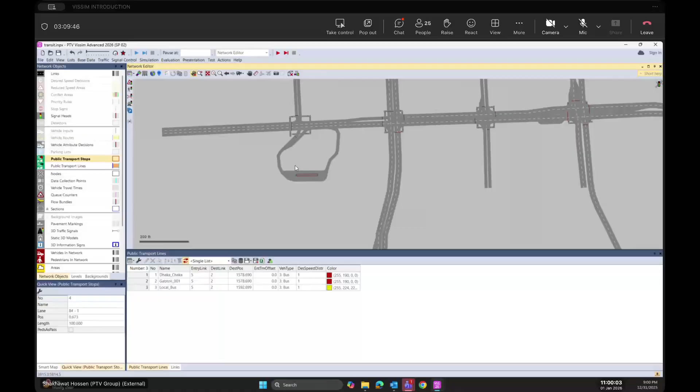When you are done with all of them, putting appropriate bus stops, the next thing is we need to put the public transport line. So next, we select public transport line. Oh, there are already some public transport lines here - Dhaka Chaka, Gabtoli 001.

I already prepared some examples and saved this one here. Okay, so let's delete all of them.

So for the public transport line, maybe this is the starting point and this is the ending point of the bus. We might have multiple public bus routes, as you see here - Dhaka Chaka, Gabtoli, or whatever, multiple public transit routes. So just right click here, select the starting point and select the ending point first. Give it a name, maybe this is Dhaka Chaka.

So this is one of the routes. When you draw the route here in VISSIM, by defining the starting point and the ending point, VISSIM will automatically complete the route by taking the shortest path. Here you see this is the shortest path for that route.

However, as we discussed earlier, the main purpose of a public transport line is not the shortest path - it's maximum serviceability, to serve the maximum number of people. So for that specific Dhaka Chaka service, this might not be the appropriate route. This route might need to take that circle, and then go that way.

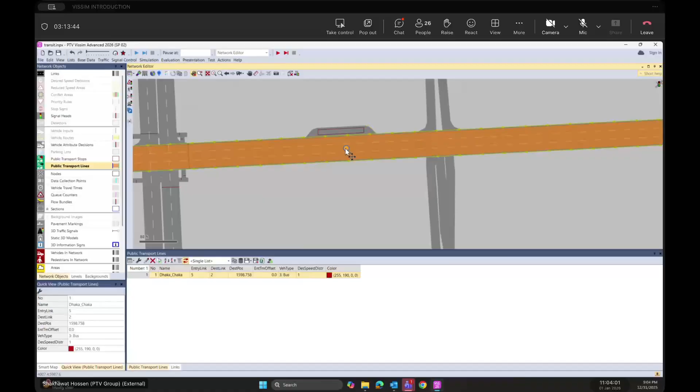For example, if I just add one intermediate point here and move it, as I zoomed in, there's a chance VISSIM will automatically shorten the route for your downstream side. So if I move it here, VISSIM will sometimes automatically truncate that route and move it from this link to that link. So just to make sure that doesn't happen...

What you can do is add two more pivot points, one at the upstream and one at the downstream of your stop. So this is our stop, add one pivot point upstream and one downstream. Now if you move something from here, that will be guided by these two pivot points. When I move this one, the starting pivot point is pink color and the downstream pivot point is cyan color. So if I move something here, everything will be guided but fixed based on those two pivot points, one upstream and one downstream.

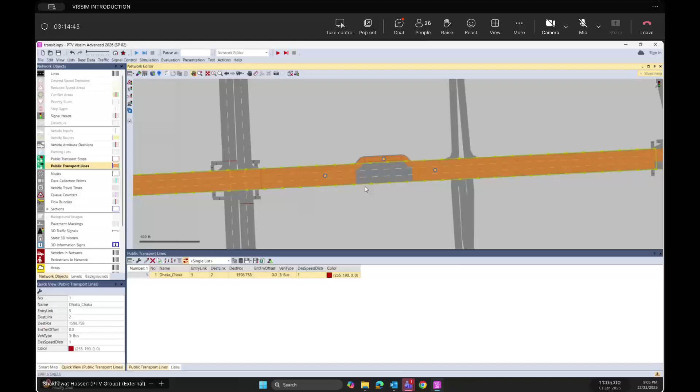All right, same thing here. We need to get the bus to that specific bus stop. So add one more intermediate point and two more pivot points at the upstream and downstream of that stop, now onto that stop. Do we need any more? Oh, okay, we also need to move this one. So add one more pivot point upstream, downstream, and this is the stop.

Now we are done with all the appropriate routing, right? So this is the routing starting point, this is the route's first stop, this is the second stop, and the bus is taking that loop, and this is the third stop. After taking that loop, it will go away. So probably that is the route for Dhaka Chaka, right?

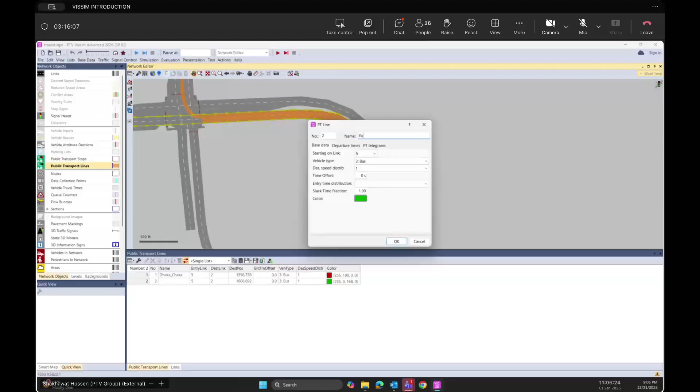Or maybe we might have another bus route, so let's create another bus route. Same thing, select public transport line, hold Control key, and right click there. That's the starting point, and put the ending point here, and give it a name, maybe Express. This express bus is probably supposed to take this route instead of taking that loop, instead of waiting there, as this is an express bus or could be BRT or whatever. So it will go in that way and take a left from that third intersection, and it will take that route.

So again, same thing, add one more intermediate point, move it here. All right, now it will stop. Probably this express bus will only stop on this second stop, right? It won't stop on the first one. So just add one intermediate point and two pivot points, move this one there. So this bus will only stop on this second stop and skips the first stop. In that way, you can define this.

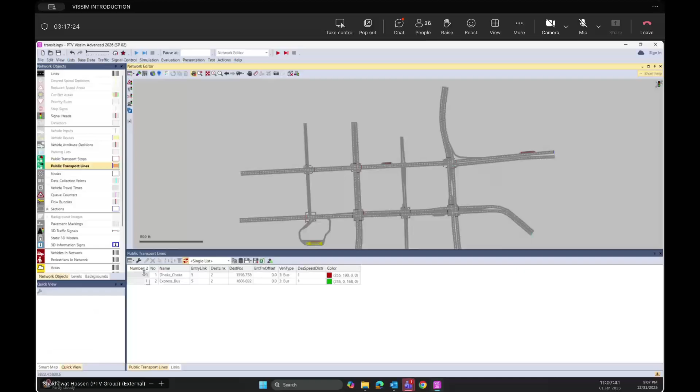Okay, so adding this stop is simple. Select public transport stop, hold Control key and right click, hold your right click mouse, drag, and release your right click. Then it is asking for some name. Then that is the stop, and right click on your stop, add lay-by stop. It will automatically create a bus bay and move the stop to the bus bay.

All right, so in that way, now we know how to create the public transport stop as well as public transport line. Now let's deep dive into a little bit more detailing on those two items, public transport stop and public transport line. Let's go to one of the public transport stops, just double click and open the window for the PT stop. PT stop means public transport stop. First, under the PT stop, we have two tabs: the first one is base data, the second one is for the boarding passengers.

So base data is just for the basic information. For example, this PT stop is on link number 84. If I hover over here, you see that is link number 84.

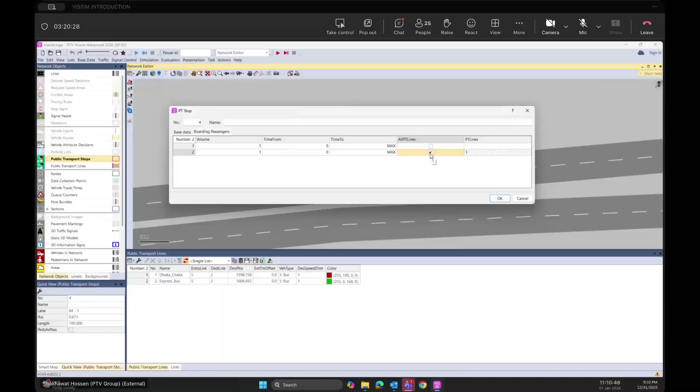Okay, now let's open the feature menu for the public transport line. So you can, again, directly open by double clicking this one, or you can open by double clicking from here.

Okay, so here, after opening this one, it has total three tabs. First one is base data. Again, it says from which link it starts. It starts from link number 5. And this route is valid for what vehicle type? As that is public transport, that is bus, you say bus.

If you want to do modeling for the light rail or heavy rail, you can also do that one as well. So for example, Dhaka's new light rail or metro rail, you can also do that one for rail as well. So as this is bus, you say that is bus. All right, now desired speed distributions, you can also define the desired speed distributions for the buses.

Next one is time offset. What would be the offset for the bus for two consecutive services of the bus? And entry time distribution. So for the entry time, what would be the time distribution? Is that very stochastic or that would be very deterministic? You can define that one as well, from here.

Okay, slack time fraction means if a bus runs early or if a bus runs late, you can adjust the earliness and lateness by changing the values of this slack time fraction. Slack time fraction mostly stands for the early: if a bus runs early into your stop bay, then how many seconds it will wait there just to adjust with its scheduled time. You can define that one from the slack time distribution.

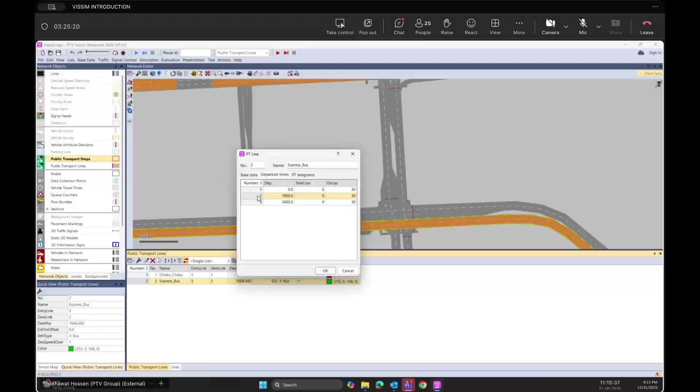All right, now click OK. You can do the same thing. So for express bus, double click, maybe express bus departure time. Express bus arrives once every 30 minutes. So right click, generate start time, once every 30 minutes, 1800 seconds. And occupancy, probably 30. Click OK. So now first bus will arrive at 0 seconds, second bus will arrive at the 30 minute mark, and last bus will arrive at the 60 minute mark, with occupancy of 30. Click OK.

Okay, now for example, this is our express bus. From the express bus route choice, we can see that our express bus is taking only one stop, at the second stop, right? However, this is the stop. If I run the simulation, the bus won't automatically generate from this stop, right? The bus definitely will generate from the starting point, and it will travel all the way there, and it comes here.

Same thing for the Dhaka Chaka. This is the first stop. The bus will generate here, travel that distance, and then come into that first stop. Now, for the express bus, as this is the first or only stop, if we look at our departure time, the first bus comes at 0 seconds, second bus comes at exactly the 30 minute mark, 60 minute mark, right? Meaning these numbers or this time is for this very specific stop.

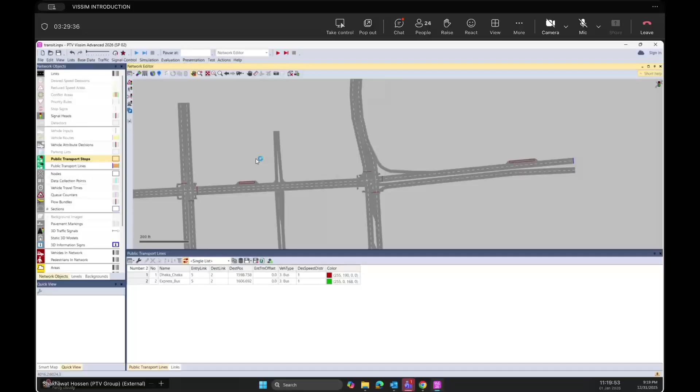So let's measure the distance from here all the way to here, which is around 1332 feet, or let's assume 1300 feet. If the bus is running at maybe 40 kilometers per hour, converting to feet per second, that's about 36.45, let's say 36 seconds. So the travel time for the bus from the starting point all the way to the stop is 36 seconds. That's the travel time. And after traveling here, the bus will definitely dwell here for some time to alight and board passengers, probably an extra 30 seconds, or maybe 60 seconds. So 60 plus 36 seconds is 96 seconds.

So our entry time offset for the express bus should be 96 seconds. Make sure when you do public transport modeling, that you don't make this common mistake - put the appropriate entry time offset for your corresponding bus route. For the Dhaka Chaka, the entry time offset would be from this starting point all the way here, maybe 4 or 5 seconds - let's assume 5 seconds - and maybe dwell time of 60 seconds. So 5 plus 60 is 65 seconds.

All right. Now, we are defining the stop, we are defining the route, we have also defined the entry time offset. If you need to do some additional thing, you can also do that one from here. Under the public transport line, on top of the list, you see there is a drop-down option.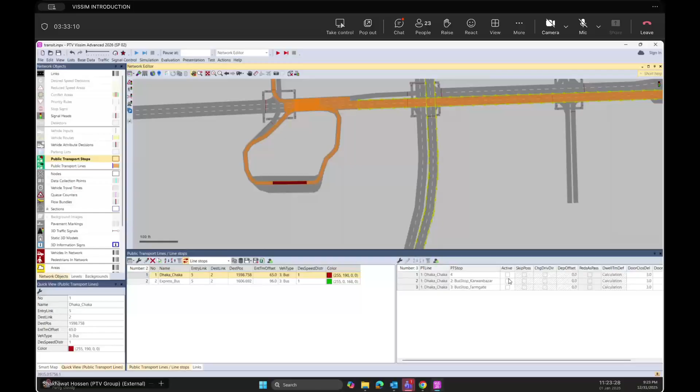So we need to make sure which stop is active for that specific route. Those are the available stops for that bus, and among those available stops, maybe only stop number 1 and 3 should be active, and stop 2 should be inactive. That means Dhaka Chaka has an available stop at Karwan Bazar, but that bus doesn't use it. Now, under that bus route, you can also check which stops are active for that specific bus route.

You can check that from this line stop table, or you can directly check it from your network editor. Immediately when you choose a certain stop to be active, that stop will turn red with a white arrow mark, meaning that stop is active under that bus route. From here we can say stop number 1 and stop number 3 are active, so this one and this one are not active - you see, that's why it's a different color. And the last one is also active, with an arrow mark.

So in that case, for every bus route, you can define which among all the available stops are active for that specific bus route.

Now, how do you calculate the entry time offset? You remember we discussed travel time, and also the dwell time - how many seconds the bus will stop there. We can also define the dwell time for each of the bus routes at each of the stops. Dhaka Chaka might not have the same dwell time at each stop - we probably can expect it has higher dwell time at the Farmgate stop, whereas it has a lower dwell time at some other stops. So it might have varying dwell time at different stops. We can define that as well.

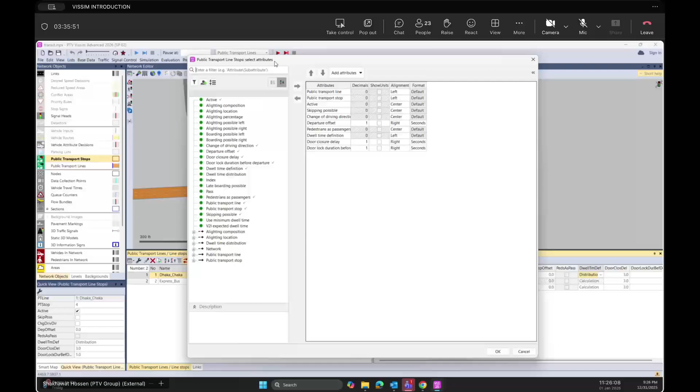Now, what would be the distribution? To check that, you see that black arrow. If you select it, it will open up a new window, and from here you can select all the available items under that line stop options. So from here, look for the dwell time - you see dwell time distributions. Move it immediately after the dwell time definition, dwell time distributions.

Now from here you can see the bus will stop at the first stop, and the dwell time definition is based on dwell time distribution, and that dwell time distribution is based on this one. Again, we don't know what that one means, so to check that we need to go to the time distribution. Here we can see the time distribution - base data, distributions, and from here, time. So from here, we can see one means with mean value 1.30.

Let's give another distribution. Probably this is a 60 second distribution. Lower limit could be 50 seconds, upper limit could be 80 seconds. Empirical, or we can put some normal values with an average value of 60 seconds, standard deviation 5 seconds. You see, it creates a nice half bell curve.

Now if we go to our line stop, and from here dwell time distribution, we can select 60 seconds for the first stop.

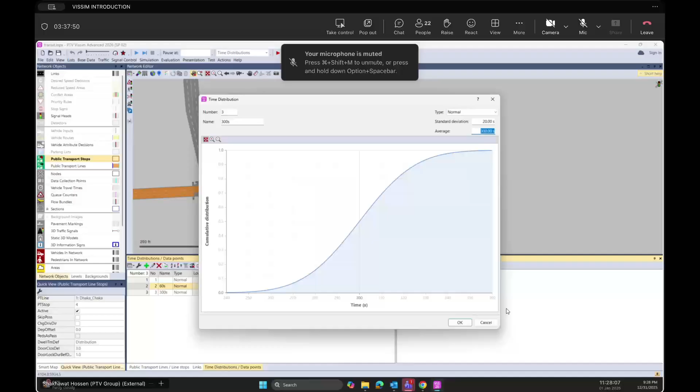Under the distribution, let's create another distribution, maybe 5 minutes, equivalent to 300 seconds, normal distribution, 300 seconds, standard deviation could be 20 seconds. So another nice half bell curve, this is 300 seconds.

Bus stops at Farmgate, and dwell time definition should be distribution, and this distribution should be 300 seconds, so that the Dhaka Chaka bus will stop at the first stop for 1 minute, 60 seconds, and at the third stop it will stop for 5 minutes or 300 seconds. In that way, we can define the varying dwell time distribution for different stops, and even for different bus lines as well.

Any questions, or anything that you want me to show you again?

Time distributions - any kind of distribution you can get under base data and distributions, and from here time. For example, if you would like to add your own custom time distribution, simply click the plus icon and it will open up this window, give it a name, maybe 2 minutes, 120 seconds.

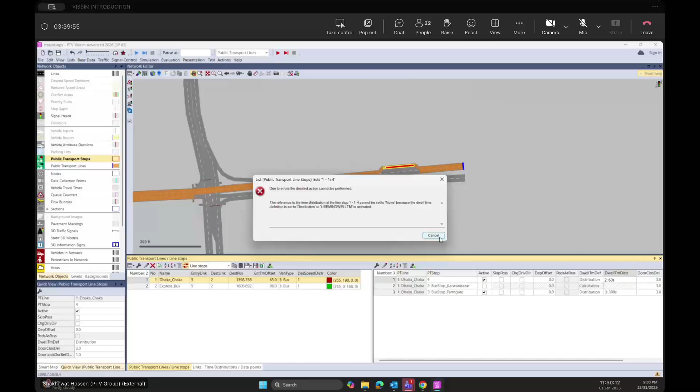Or maybe you can change this one to 120 seconds. In that way, you can change your time distributions from one time distribution to another. So now the bus will stop at the first stop for 2 minutes.

Now there's a question for you. Is there any other potential method you can follow to dwell at a certain stop based on a fixed dwell time distribution? For example, on the bus first stop, the bus is supposed to dwell there for 120 seconds, meaning 2 minutes. But the bus will show up there and seems like there's no boarding passengers or very few boarding passengers, very few alighting passengers, maybe one or two boarding, two or three alighting. In that case the bus only needs maybe 15 or 20 seconds - it doesn't require dwelling there for 120 seconds.

So what do you think? In that case, what could be the best method for the bus to dwell at a certain area, certain section, or certain stop instead of having that fixed dwell time distribution? What could be the best or most efficient method? Any idea?

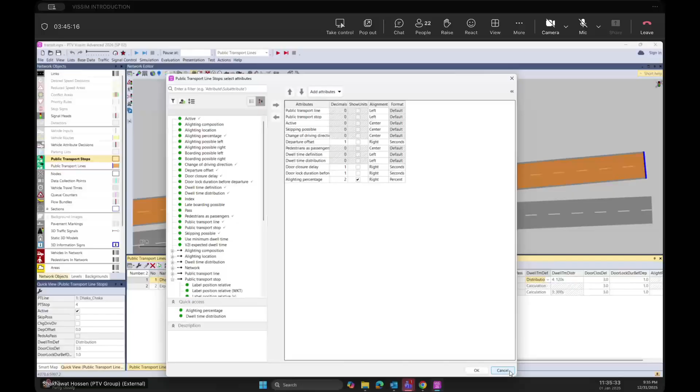There's another option for the number of passengers - public transport lines, public transport stop. Oh okay, we can get those numbers from here. Departure offset here, we have each stop.

No, not from here. I'm looking for that one. Just give me a minute. Line stops, from here.

Okay, so I cannot see that one right here. That could be somewhere in some of the options, or probably somewhere here, alighting locations. I cannot find that one right now.

When you choose from distribution to calculation method, you can define the number of boarding passengers and the number of alighting passengers. Based on that, how many seconds would it require for each boarding and alighting? VISSIM will automatically calculate the dwell time, and based on that, the bus will dwell there for that specific time associated with the calculation of boarding and alighting passengers.

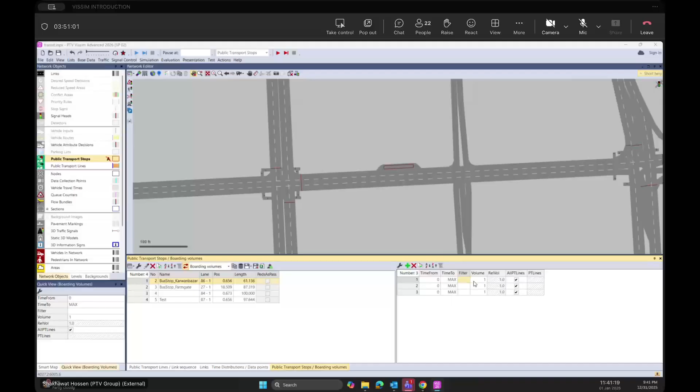So for example, the first one, volume - it shows the boarding volume here on the right. You can define the boarding volume for each time period. So if you have multiple time periods from your splitting time, maybe 0 to 1500 seconds, or then 1500 to 3000 seconds, you can define that from here. You can define the volume, and whether that is active for all PT lines or very specific PT lines, etc.

Maybe not all PT lines, only for example express bus or whatever. From this drop-down option, there are public transport line stop, public transport lines active. So public transport line stop shows all available stops for that bus, for that route. And from here, another option is public transport active, which only shows the active routes for that bus - active route, active stop bus routes.

So either way, you can interact between the public transport stops and public transport lines. Either from public transport line - this is the public transport line - from here you can go to the stops, for example here we can see the stops. Or from the stops - this is the stops - from the stops you can go to the public transport lines as well. So it has both interactive features, from one parameter to another and back to the previous parameter.

All right, any questions regarding the public transport?

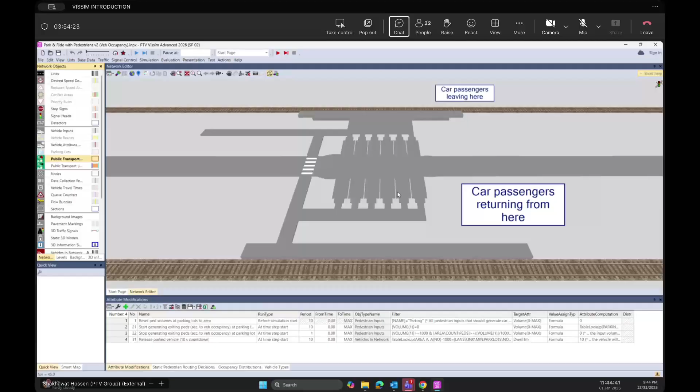So this is a very good complete example, an interactive example between private transport, public transport, pedestrians, passengers, parking, everything. So if you open this one and simply run the simulation by clicking simulation continuous, then you will see the simulation is running.

You see a car shows up here, and then it drops passengers here. And then another car shows up here, and those passengers take that route. They'll cross that link. And this car is waiting for the pedestrians.

And now they wait here for the light rail. The light rail shows up at its defined schedule. They board in, and after a certain dwell time, that light rail departs. And a few other passengers show up there.

And they wait here for the next train to arrive. Once that train arrives, they will go there. And here is another train for the westbound traffic, and some passengers alight from the train, and they can take the taxi service or Uber, board into that car, and now this car is ready to depart.

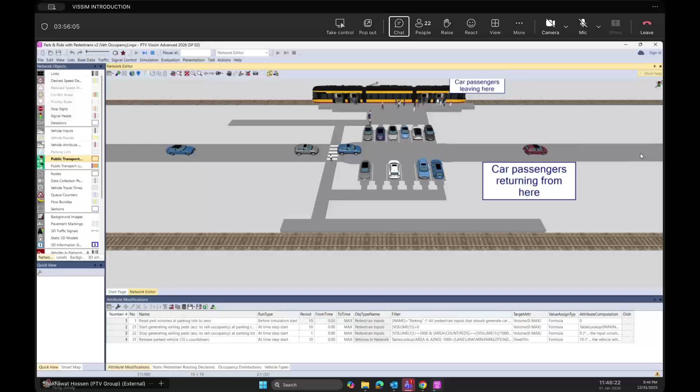So this is one of the very good examples of what you can do in VISSIM. The best part of VISSIM is you can incorporate everything under a single modeling file. You have normal vehicle simulation, pedestrian simulation, light rail simulation, public transport, parking—everything under the same umbrella.

So here, the modeling—for example, if I stop this one—the modeling is not pretty much straightforward. This one has lots of scripting. You see those are the attribute modifications. You need to do some kind of attribute modifications, and you need to define some coding here.

If I open this one entirely, for example, this is the coding, the values, and you need to define some filtering method. So you can apply Python scripting here to do some kind of advanced coding, advanced scripting in that way. For example, here we have a total of 4 attribute modifications.

And we also have defined vehicle types: one is for car and another one is for tram, meaning the light rail. With this attribute modification, pedestrian vehicles will show up here and they will wait here for the parking lot. Those are parking lots. If I turn this on, and if I go to the 2D mode, you see that blue color—those are the parking lots.

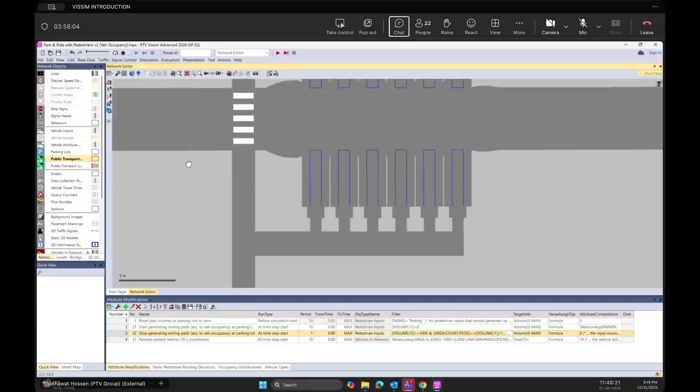So if I go to the 2D mode and go to the conflict area, if I turn this on, here you see there are some conflict areas between the pedestrian link versus the main link for the traffic, right? And definitely when a pedestrian appears here, the pedestrian has the highest priority over the traffic. So if a pedestrian shows up here, the pedestrian should have the highest priority to cross the road. That's why along the pedestrian route, we have green color, meaning it has the highest priority or higher right of way compared to the vehicle.

So along the vehicle route, you see that is red, meaning if a vehicle shows up here and sees there is a pedestrian crossing the road, the vehicle will definitely yield to the pedestrian. So those yielding behaviors you can define by these conflict areas as well.

All right, so now, for example, in the 3D mode, or even in the 2D mode, if you run the simulation and don't want to show those conflict areas—because you have defined the conflict area rules and you are fine with them—you can just turn that off. So the conflict area is gone, meaning not gone, it's hidden. It's still active in operation, but it's hidden. So now you have a nice view from here.

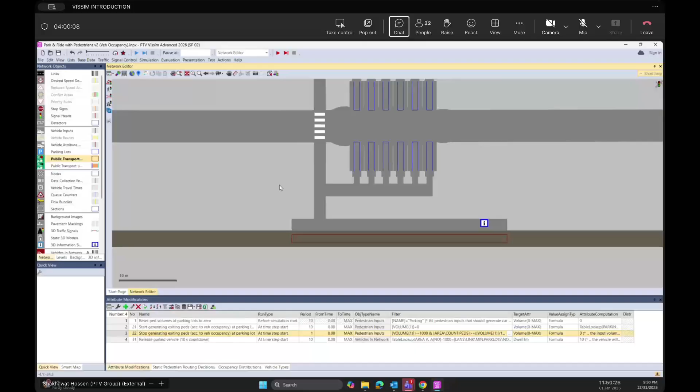So in that way, you can do a complete modeling into VISSIM, starting from scratch, from your link, and then building the network for your regular traffic, private traffic, then defining your public transport for your bus route. You can also define the pedestrian by doing Viswalk modeling. You see pedestrians show up here, they walk nicely and cross the road, and they are waiting here for the light rail and taking the train. So in that way, you can define or build your own network for your own city or jurisdiction. So you are the future traffic modelers, future traffic leaders, and in future, definitely you will be doing this to have a nice model for your own city or country, whatever.

Pretty much that's it for our today's session. Still, I have lots of things to say, because if you let me, I can continue for maybe not 4 hours, 3 hours, just going over the ins and outs of VISSIM, what we can do, what are the methods, etc. But because of the time constraint, I tried to cover the overall idea of what you can do from scratch and what are the options under public transport. So we still have 9 minutes, and the rest of the 9 minutes is for you. If you have any question or anything, the rest of the time is for you.

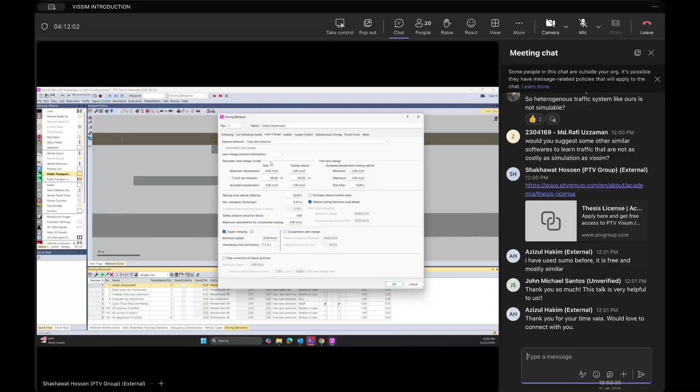Would you suggest some other similar software to learn traffic simulation that are not as costly as VISSIM? There's another software called TransModeler, which is a little bit less expensive compared to VISSIM. There is also some free software, I believe Sumo, yeah, someone mentioned Sumo. Sumo is a free software, you can start learning simulation with it. But as it's free, it's very much limited, you might not have that much option. Someone said they've used Sumo before, it's free and mostly similar.

Thank you so much, the talk is very helpful. You are welcome, thank you for the time, Bhai. Would love to connect with you, and also plan to take advanced lessons on this.

Depends on how you find this useful, or how you are interested. Regarding that, you need to contact BUET ITE first.

There's a hand raised from Tofikur Rashid. Do you have any question, Tofikur Rashid? Yes, am I audible? First of all, thank you for your nice support for 4 long hours. I have a question, the last simulation you showed us, the park and ride, is it shared with us? Yeah, if you follow the link, it is shared there.